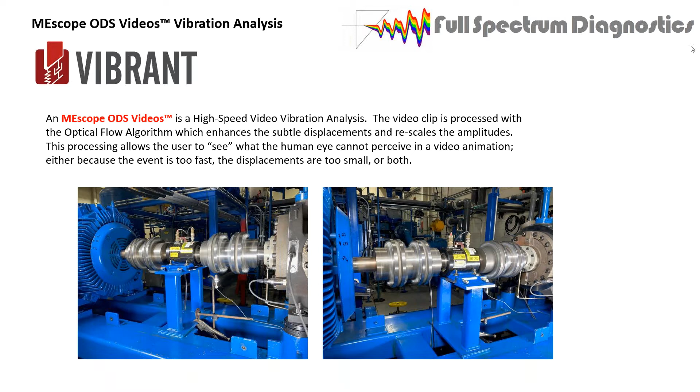Let's step through this. Where is it? My screen's locked for some reason. Sorry about that, let's see if it breaks free here. There we go, okay, this is that same system we just looked at. Oh, we're not there yet, Dan. I don't see anything. You don't see anything? No. Oh great. Okay, waiting, it says waiting to view Dan's screen. I don't know if you have to hit go somewhere. No, I don't think so. There we go, now we see it. Okay, that's it, that's it. There's some show screen button, I should have known that. You go.

All right, there we go. Now we're seeing. You saw this page though, right? Yeah, we got that page. What this is, is ODS video, and I pointed right at the center of the system on the torque platform, and I shot the entire wide view. So I got both couplings, the end of the motor, the end of the compressor, and the torque stand.

And I put on the orbit plot so I could see the motion, and you can see it looks like it's kind of galloping on either side of the torque stand there. But the orbits give you a good idea of what the direction of the motion is. So the torque direction or twist direction would be vertical, and in the axial direction, that would be the thrust-related problems. It looks like a lot of these orbits are longer in the axial direction than in the vertical direction, and it makes sense, and it looks like what we're seeing.

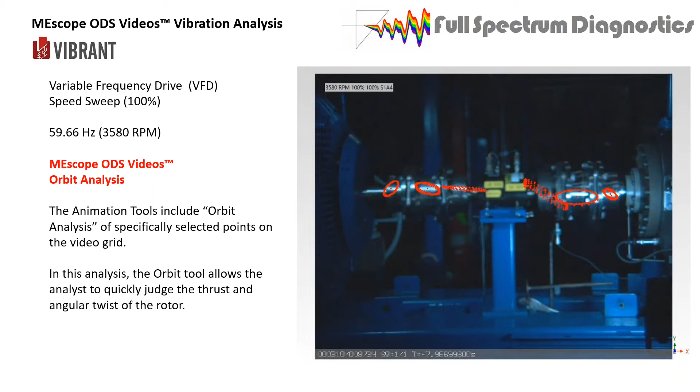Here was the 100% speed, 60 Hertz, for 3580 RPM. This is 3225, so 90% speed, and you can still see the orbits are a little smaller in size, but they're still in the axial direction for the most part. There's a little more axial than vertical.

This is at 2865, or 80% speed, and it looks like a sweet spot. We've lost a lot of the amplitude in the orbit. There's still some thrusting motion you can see in that direction, but this is one of the characteristics of the Shim pack coupling - it dissipates energy that way and keeps the alignment, tolerating a lot of offset misalignment, but it also has to move a little bit in the Shim packs to do that.

So we're at 80% speed. This is down to 65, and again you can see all the other things going on. This is what caught our attention - actually, the speed sensor caught our attention first, but the platform with the torque meter on it is moving.

After processing a few of these things, we came to the conclusion that our test stand didn't look like real life at all. What's happening in the field is they have no torque stand, obviously - they have a single coupling, and actually a different size coupling, which is another issue we'll get into. So we thought, let's modify the test bed, take out the torque stand, move the motor over, and just have one coupling.

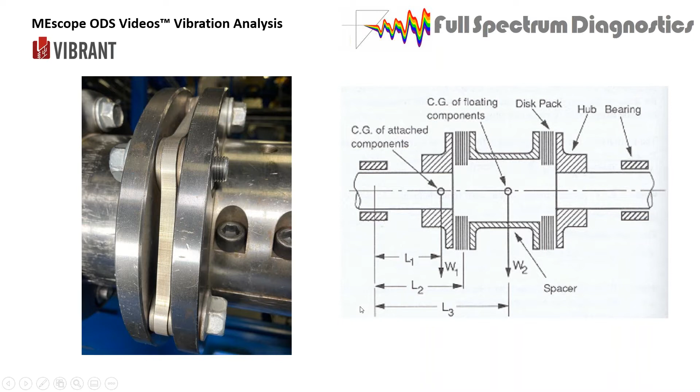So now we have a system that's a little softer than just a rigid coupling. Every time I get some type of torque oscillation, thrusting, or offset misalignment, it puts a shear into the Shim packs and allows the coupling to dissipate some of that energy. They're sized for all kinds of different horsepower configurations, torques and speeds. That's how this kind of works, without getting into too much detail.

So the shaft is spinning. We processed it so we can see rotation at 1 times RPM. There's very little motion in the compressor itself. We did detect a little bit of a soft foot in one of the feet, but besides that, it was pretty much rigid.

This is the animation in the FFT, which doesn't show the rotation of the shaft - it just shows the rotation and what happens every revolution. So this is at 1 times RPM. Put my cursor on that and it'll show me how that motion works, like any good operating deflection shape. If you look at this long enough, there's some thrusting in here. Most of the motion is a little radial or twisting, but a lot of this is the axial motion, or this galloping in the shaft direction that I mentioned in the last animation.

That's all good. It looks like something I'd say we're dissipating energy from residual imbalance, residual misalignment, normal angular offset and radial offset. Where the thrust comes in is on the output side.

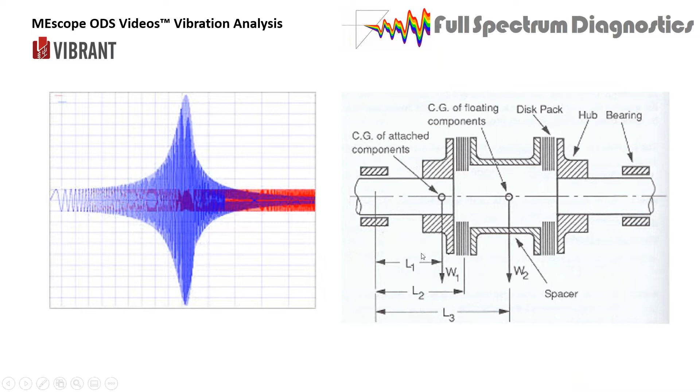Okay, so here's what we have. We took out that torque stand. We have 1 coupling now with the shim packs in there. And I'm showing the rotational speed of the shaft at 45% speed, which is 1611 RPM, and I filtered that out.

So as I explained before a little bit, I took the total time waveform, just the raw data. I did an FFT of that so I could see the frequency content. I put a narrowband filter around the turning speed of the shaft and did an inverse FFT. So now I have a time waveform that is just the turning speed of the shaft, okay.

So I have something that I think how this should work. If I have an angle of twist in a soft system like this, I have the motor driving some of it, and it's exactly like this: very low amplitude on the motor side, and the reaction torque that's being generated will be a little bit higher on this, spooling into the spool piece. Same thing in the compressor—it'll be lower here and react through that spool piece, and through the shim pack I should have something going on, actually maybe a twist a little bit more, and we'll see some that have a little more twist and others that don't. But this should be out of phase with the output side, and there should be some reaction response in the middle here.

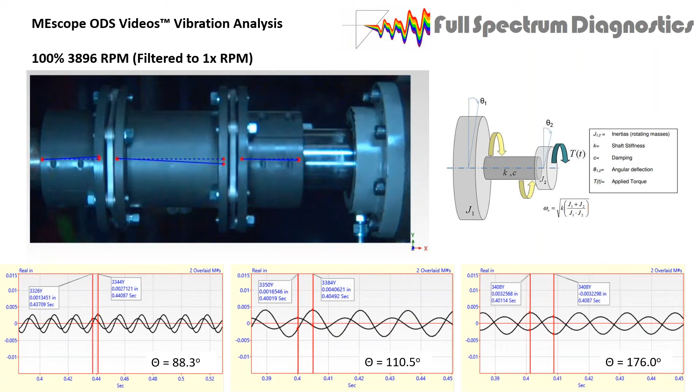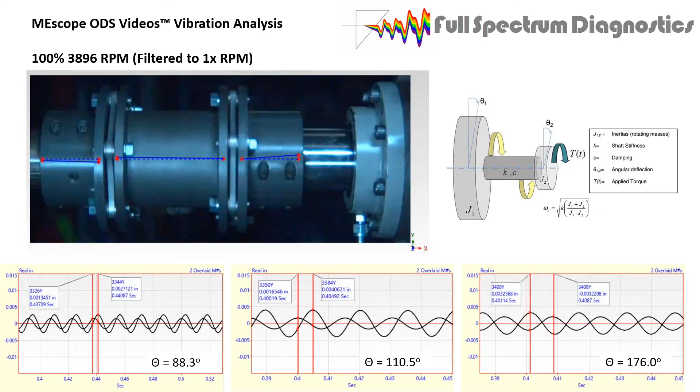This is, and then actually next week I'm going to do a grid style coupling in a plant. They wanted me to see what the alignment looked like on it, so I'll know more. It's a learning adventure.

This is a scroll system in a sugar beet factory. Sugar beets are where most of the table sugar in the United States comes from. Everybody thinks of sugar cane all the time, but the big beet farmers in North Dakota and Minnesota capture the entire market. These scrolls slice up the beets and boil them in water, then push them through these scrolls. When they're saturated with water like that, they squeeze all the liquid out and it turns into pulp. Then they discard the pulp, and what's left is sugar water, and quite a bit of it.

This is a very difficult analysis project because of the speeds involved. The output speeds of these scrolls are 1.2 RPM, so very slow. There's a massive gearbox on the input side of this scroll system that you can't see here. I'll show you the diagram in a moment, but it starts at 1800 RPM. Its belt drive is huge, and it drops the input speed to the gearbox to 216, and it's a quadruple reduction gearbox.

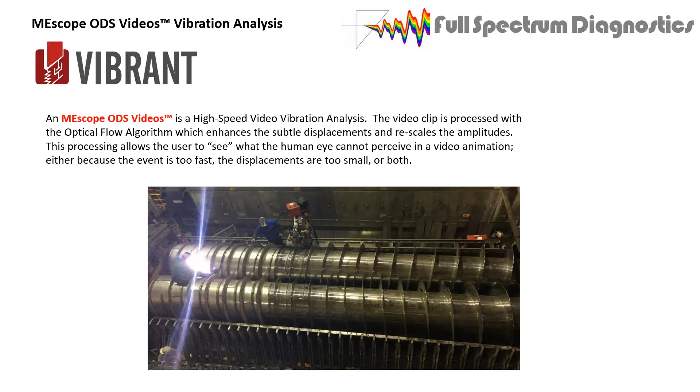This is the gearbox, and my portion of this project was through a little window on this side, about a 16 by 9 inch window, and another on that side. This gearbox input speed is 216, and there's dual outputs, so the left and right scroll get independently run, or they're all geared together so they run exactly the same speed. This gearbox shows you where all the meshings are.

So what I'm interested in, looking at the video through the side, is what frequency am I seeing, and is that frequency of interest to me? More about that in a minute. Here's our pinion, it goes through an 18 to 63 reduction. There's a 19 to 58, a 17 to 65, an 18 to 79, and we're out of this at 1.2 RPM. There's a few other frequencies that we'll be interested in. The gear mesh frequencies go from 3888 down to 95 RPM.

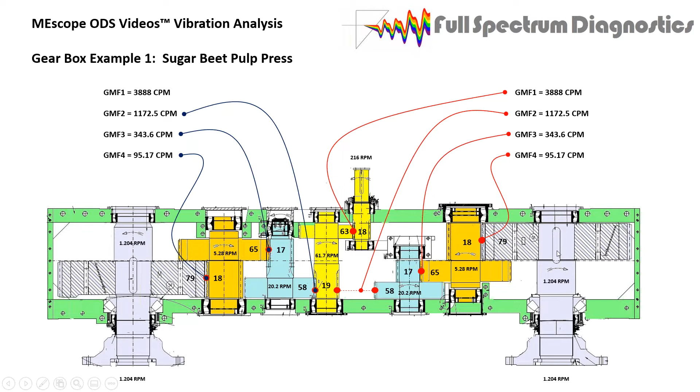So we'll take a look at those and some of the shaft speeds and whatever else we can pull out of this. This is a spectrum from the video camera. We pulled out time waveforms for every location, every grid point we defined, thousands of time waveforms. We also process those in FFT or Fourier spectrum so we can pull out the frequency content. In this case, you're seeing a whole string of the third gear mesh frequency. The first and second gear mesh are much higher frequencies and didn't show up. The third and fourth are the ones that showed up in the spectrum the most, and they generated a lot of low frequency energy.

So I have 1 through 10 times gear mesh frequency for the third mesh, and 1 through 8 for the fourth mesh. You can see all the different possibilities we have in here. There's a lot more frequency content.

It's just like a transducer analysis with an accelerometer. Put it on your structure at the bearing and you're going to pick up whatever's transmitted to the bearing. When I shoot a video, I'm picking up the spectrum of every point in that video on the gear. So I'm seeing directly what the gear is doing instead of trying to figure out what the gear is doing as its energy runs through the whole system and out the bearings.

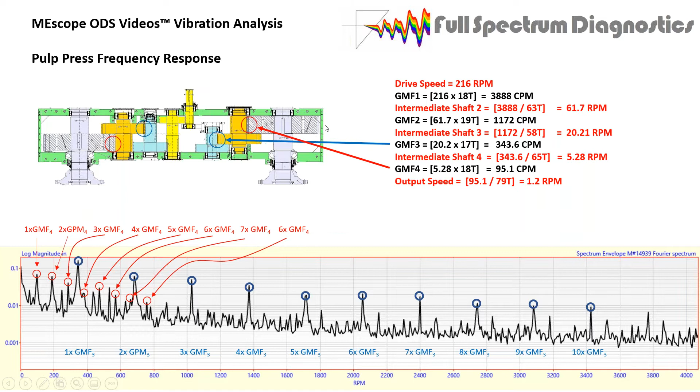Here's the locations of meshing that we're interested in. The third mesh and the fourth mesh are the two locations that we're going to be able to see through the ports on the side of the gearbox.

There's another thing you can do with the MEscope software that the competitors can't do. You can draw some lines on your system and see the motion and the difference in the motion. So I just outlined a couple of the gear teeth that are in view and put their links along here, just to see how one mode relates to the other.

And this is 1 times gear mesh frequency for the third mesh and 1 times gear mesh frequency for the fourth mesh. And it looks like the third mesh is flexing this gear, and the fourth mesh is flexing something else back here.

So even though you're doing a video analysis, you still have a frequency analysis and a time waveform analysis, especially for low-speed gear systems. That's really important.

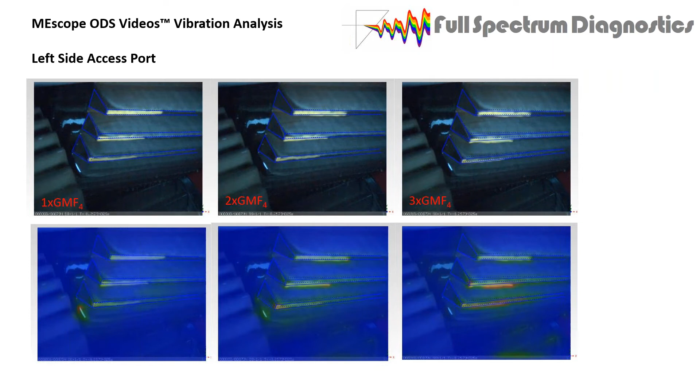This is how I originally looked at it. Put some color contour on. These are a bunch of different gear mesh frequencies, multiples of gear mesh. We have a normal exposure at the top so I can view the teeth and see them bouncing in there. They seem to be waving a little bit. Nothing's quite the same. The color contours give you a better idea of where the maximum motion is.

So they're all different. Every time you get a tooth engagement, it lets go, it rings the gear, and it rings all the natural frequencies. It's like hitting it with a modal hammer and getting the frequency response. It gives you an idea of how it's reacting to this knocking sound or binding of the gearbox. So when I go look at the other 4 gearboxes, I can see if they're doing the same thing. They're all supposed to be identical, but you never know.

This is another gearbox, in a cement plant. It's a ball mill or finishing mill. We have a synchronous motor here at 720 RPM, a huge gearbox with triple reduction, and a ball mill on the end. This rotates and has giant balls, steel balls in it, like shot put balls, and it rolls and tumbles those balls and crushes the rock into powder.

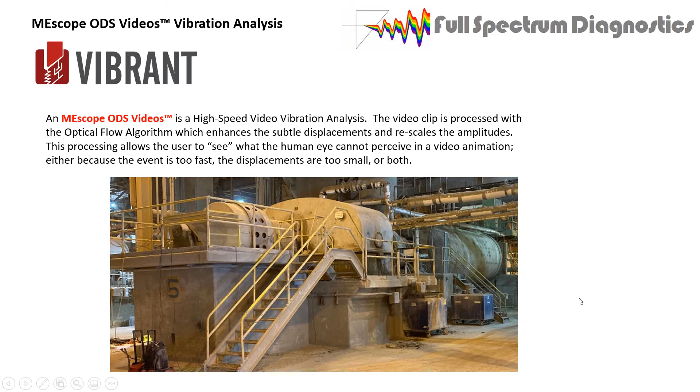What you see all over the place, this is one of the dirtiest places on earth, is cement powder everywhere. In some rooms it could be 6 inches deep. Up on this platform it was about 3 or 4 inches deep because nobody shoveled it off in a while. Not the most desirable place to be, but it was a very interesting gearbox.

This is how it's laid out. There's a dual drive system after the pinion. Input is 720, it drives both of these 370 tooth gears. So now the speed of each of these gears is the same. That shaft mates up with the output shaft. And you're like, well, where's the bearing on this?

There's A, B, C, and D holding on to the intermediate shafts. Here's the pinion, it has a couple bearings holding it, linked to the motor. Out here, there's only a sleeve guide bearing out on the output shaft. This shaft drops in and sits on these 36 tooth gears. So there's occasional alignment issue that comes up because of the way this is put together.

I asked a little bit about that, and this unit has been in operation since the 50s, and it's a very good design. The people that originally designed it made it too good because they expected it to wear out, but it's just replacing parts every decade or so, and they've been running this thing since the 50s.

So we got 2 gear mesh frequencies. The one that really shows up in the data is the 3299, but the intermediate shaft speed, if you do any gear analysis, shows up as a sideband as well. And I did find one other thing, I'll get to that in a moment.

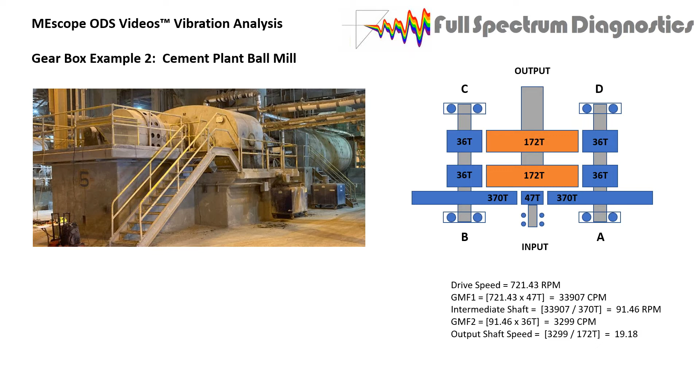So that one problem was solved. Well, not solved, they still have the wear problems. So we'll have to see.

But part of this analysis was, let's look at the gears directly with the camera through one of the ports. They had a west port and an east port. This is the west side. It was the right direction so I wouldn't get all full of oil when I opened it up. So we just took data out of the west side port.

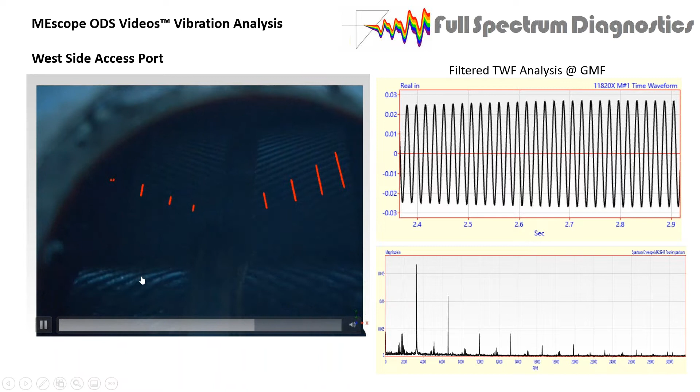This is motion that has exact numbers in it, so this is a frequency animation. The direction I'm interested in is the Y direction. So 8,000ths, 6,000ths, 13,000ths on this side. So the highest is 13 thousandths.

On this side, it's a little higher amplitude: 41, 36, 26, and 19 mils. So you have a little idea of what the total motion is.

And then this is the last cut showing a little lighter version. I put a little contrast on there so that I could see the teeth a little better. And the hardest part a lot of times is trying to get enough light on something like this so you can actually see what you're looking at.

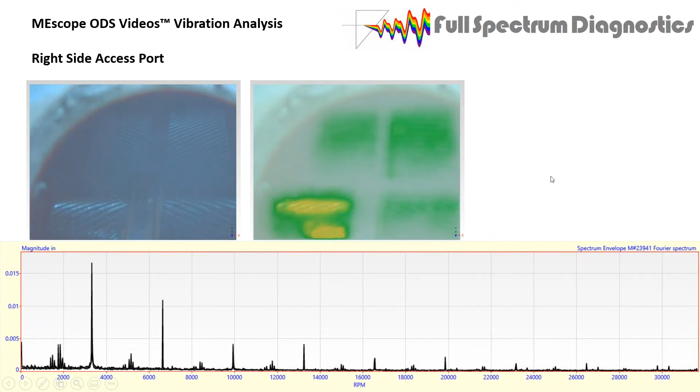I had both panels up in front of that portal, and it was a little difficult, but here we can see the color contour that's telling us where the biggest portions of motion are.

And the last one, and I'm getting close to my ending time. This is a belt-driven fan, and this is my setup on one of the measurements I took. If you guys aren't familiar with this, it's a Chronos camera, and it's a color camera. They do also make a black and white, but they make the color that I use most of the time.

This is some panel lights, and these are batteries on the back. I would suggest you get battery-powered units if you can, because plugging stuff in with cables in a plant is very challenging. So we're going to take a look at this, and one of the things we're going to look at is the isolation system for this, and very interesting.

Remember, I have turned the volume up and amplified these so that I can see the motion. There's a reason why this whole thing, the whole floor, looks like it's bouncing up and down. And that reason is because the whole floor is bouncing up and down.

This is a diamond grid plating, and I'll show you what that looks like a little better in another view. It's hard to see in this view with the dust on top of it. This was in the sugar plant as well, so there's sugar all over the floor.

I put the color on so I could see the bounce. The floor's bouncing, but the frame on the isolators is bouncing up and down too, quite dramatically, as you can see from the amplitudes.

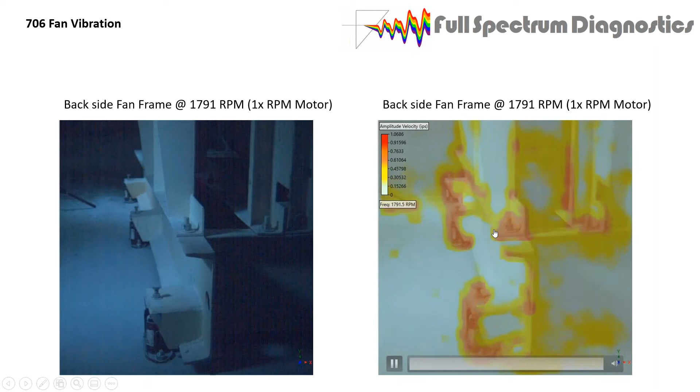This is the backside frame of the fan, similar as before. This is actually the same animation as before. I'm comparing it to the backside of the fan at 2269, running speed of the motor, running speed of the fan.

And I have two different motions. So the frame is being driven, it's a natural frequency in the structure. The isolators are really not doing their job.

Here they're bouncing up and down in the first mode. Here's the pitching mode all the way across the beam from front to back on the floor. So you can see that we're working the isolators.

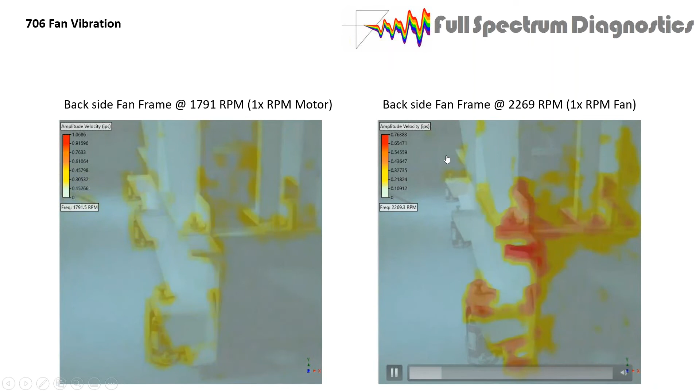I'm going to look at the other side. This is the same side of the fan, but from the other direction. Now you can see what I'm talking about, these diamond plates.

So these panels are on the floor, and I believe that they're just a loose connection. Underneath there, these thin panels are attached to an I-beam that runs across the floor. So these bolts actually do go into the I-beam, but they're sitting on diamond plate, so they're not shimmed, they're just absorbing all that energy.

So basically I have a loose condition underneath all my isolators, and they're bouncing up and down. And you can see that a little bit more on this second mode. I had a lot more motion right here. It looks like I'm working the isolator pretty hard.

Here it's kind of a node point, and out there I can't see very much from this end. But this flexing is actually occurring. There's a lot of motion in this C channel that's supporting the whole frame.

Oh, that was it. Thought I had one more slide, but that's okay.

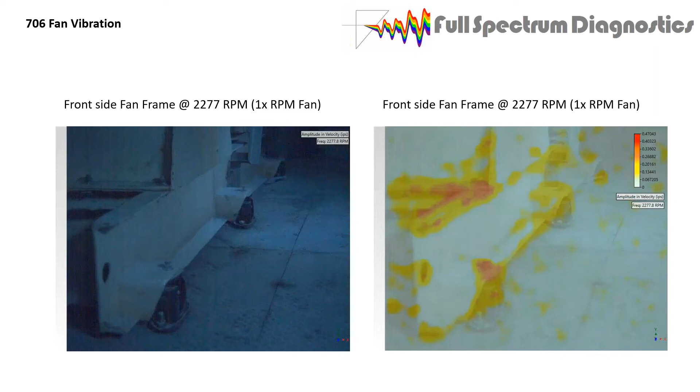We had a question: can the camera be mounted on a moving vehicle looking at a specific part of the vehicle? Absolutely, I don't see why not. You'd have to have a good mount. The motion picture industry makes mounts for cameras that take all the background motion out so the camera stays steady. If you Google it, you'll find them all over the internet, and I assume you could use one for this.

I haven't done it, but it would be interesting.

Next question: how sensitive is this method to camera motion, and can the motion of the camera be filtered out? There's a couple things. One is to avoid it - in this case I'm setting the camera up on diamond plating that's actually moving. In the software, you can pick a background location and subtract it from all the measurements. So if something in the background like an I-beam is bouncing up and down because the camera is moving, not because it's really moving, you can pick a point on that I-beam and subtract that amount of motion from every spectrum. It's not a perfect process, but it helps quite a bit.

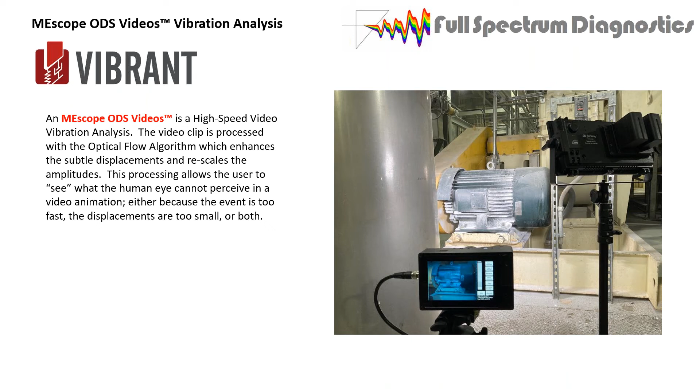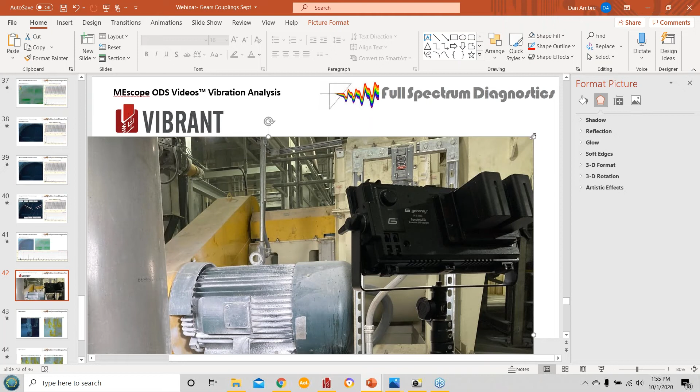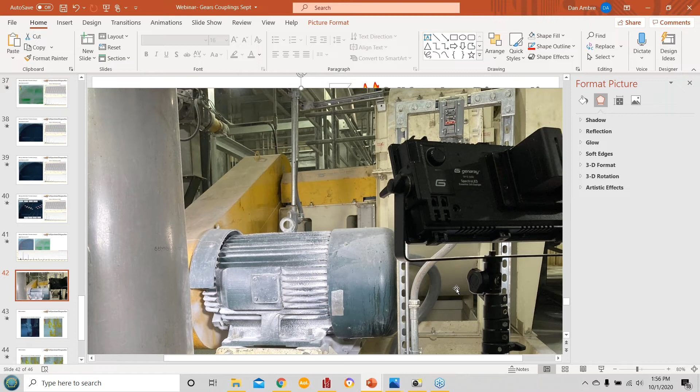I think if you zoom in you can see it on the back of that light. Generay, G-E-N-E-R-A-Y. I can't see the model number, but this model, they've upgraded it - they don't sell this one anymore. They sell another one that has more LEDs in it, which is fine. You want as many LEDs as possible when you're doing this type of work.

Okay, we got a number of questions coming in here. This one's a little more technical. Based on the coupling case study, can you relate the torsional frequencies with the MNFs to confirm torsional problems?

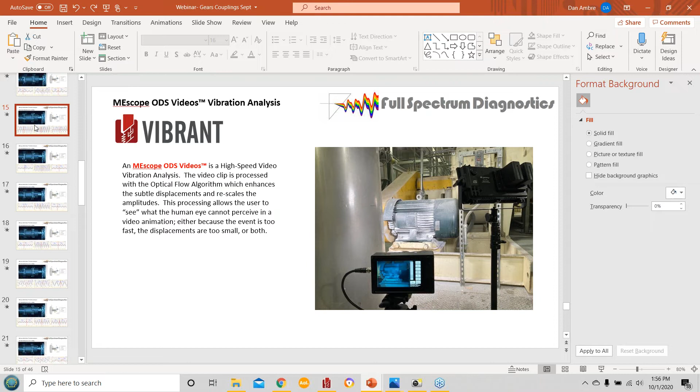If I understand you correctly, yes. I think we've got it down to, if we have a problem, we can detect it based on what we're doing. What you're looking at when we put those lines in on the side in the video, that's torsion that it's measuring. So you're measuring it directly. It's not lifting of the whole thing, it's the shaft spinning. In every revolution, it's telling you how much it's spinning up and down, if that makes sense. And knowing the difference between these two is the sine waves.

So the angle of twist is there if we have the right magnitude. I don't know if I'm explaining it correctly, but I believe you have all the parameters there to see what your torsion is. The problem we've been having is with the manufacturers of the coupling not giving us all the information as far as the inertia and the torsion testing they've done and how it varies.

All right, question about the camera. How long of a video can you record? If you leave the camera on, well, probably 2 hours or so.

It depends on how you use it too. If you turn it off in between, when you're moving stuff around, that helps. And with the lights as well, the lights on battery packs, I've found that they last about 2.5 hours. And I know that because I left them on.

I think you might be asking how long, like 8 seconds, 16 seconds. How long is the capture? Yeah, that's what I'm guessing he's asking. The capture, you can get a version of the camera that's 16 seconds, and I believe that's the highest they have right now. The one I have, the 2 that I have, are 8-second cameras. But yeah, like the low speed event, like this 1.2 RPM output on the gearbox, you'd never be able to get a full rotation. That would take 50, 60 seconds.

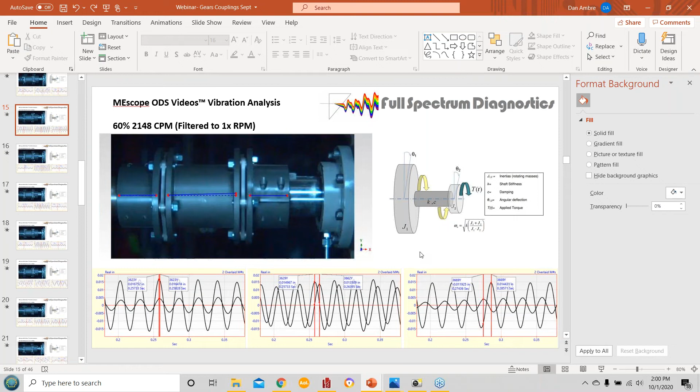Let's see, let me jump down here. Can you review how you generated the reverse FFT? Yeah, let's see if I can do one.

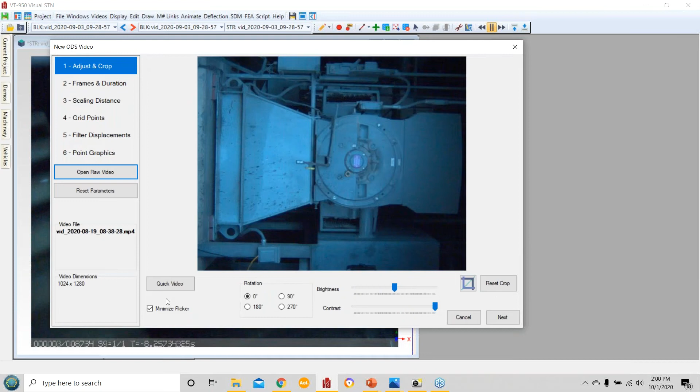This is probably something I should have done anyway. You go into the wizard, you can open up the raw video, and let me do one that'll be a little faster to process. We'll do this. This is just a motor, end of a motor. We're going to turn it sideways. We want to tell it how many frames the capture rate is. I'm not going to take 8 seconds of data, I'm going to take 1 second. It shows me right here at 1,057 frames per second, which is pretty standard.

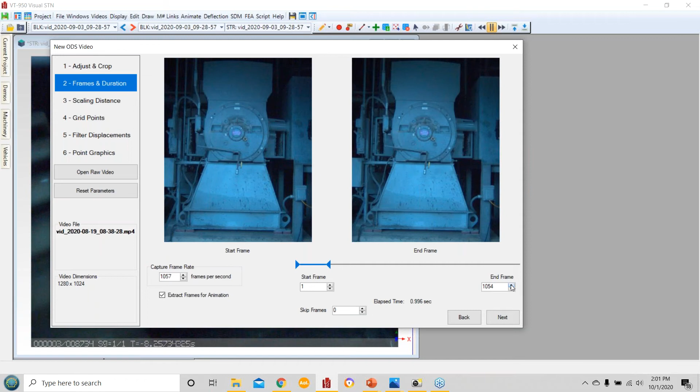Sorry, this is taking so long. Okay, so I got 1 second of data. I'm going to set my distance, and the known distance is about 6 inches, I think, right there. I can do a number of points, whatever I'd like, and extract the time waveforms.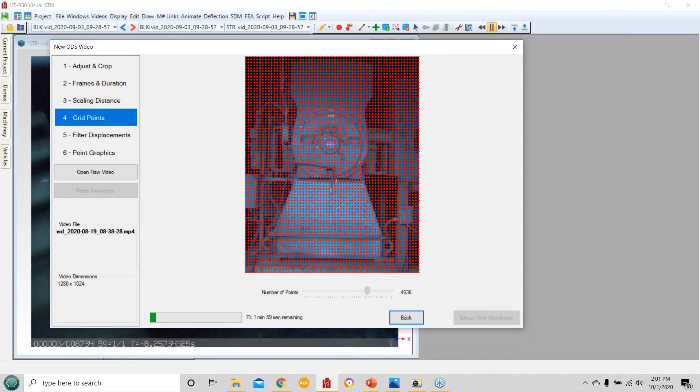Go faster. Oh, this is coming off of a thumb drive, so it's, oh shoot. So while you're letting that run, if you want, I can answer some other questions. Well, hold on, I'll just make it a little coarser, dial it back a bit. Yeah, it's still going slow. Okay, yeah, what's your other questions?

Okay, well, there were a few other camera-related questions here. How long is the capture? What's the sample frequency? What's the highest frequency that can be measured? The sample frequency is 1,057 frames per second.

That's at maximum resolution of the camera, so 1280 by 1024, something like that. You can make the camera go up to 40,000 frames per second if you want, but your resolution is going to be really awful. The best resolution is that 1280 by 1024.

So at that frame rate, 1,057, and I've never changed it - that's what I take all my data at. Your F max, you have a Nyquist factor, so it's half of that. So 528 hertz, I believe, is your frequency range.

And I was exploring a little of this. There is no anti-aliasing filter, so you can have aliasing problems that occur if you have a high input response that's above F max that might fold back into your data. I thought that was happening on one of my jobs this week, but it turns out I couldn't figure it out, or I couldn't find it. So I don't think it was an aliasing problem, but that can come up.

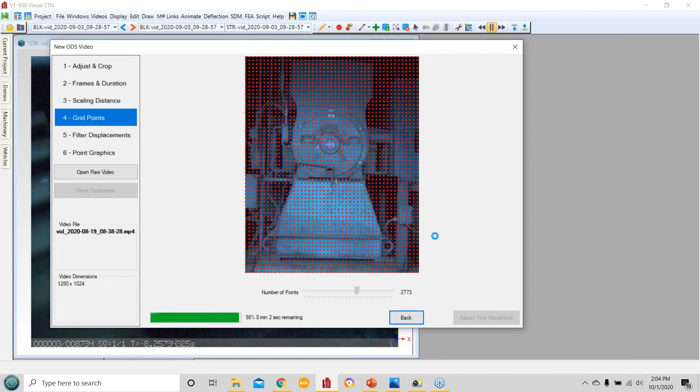So your maximum frequency range of 528 hertz is pretty good for most applications I've been around. And again, the time waveform - if you put it in the Fourier spectrum, you have 528 hertz. If you use the time waveform directly, it'll give you twice the resolution. It'll be better as far as animation, but you can't pick out the individual frequencies.

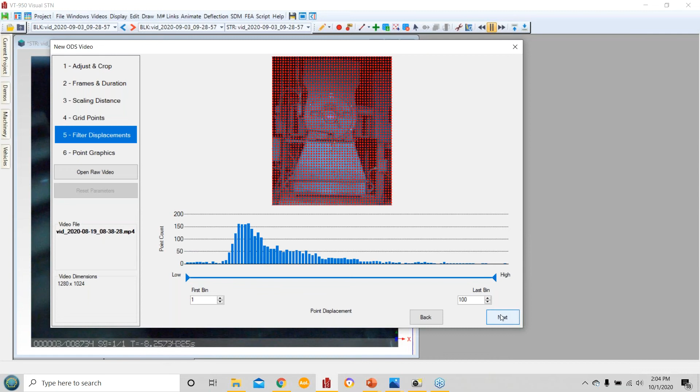Now, what I'm doing here - it was a nice lead in. Here I have finished my thing. I'm going to replace my initial data with this data. So I put it through the wizard.

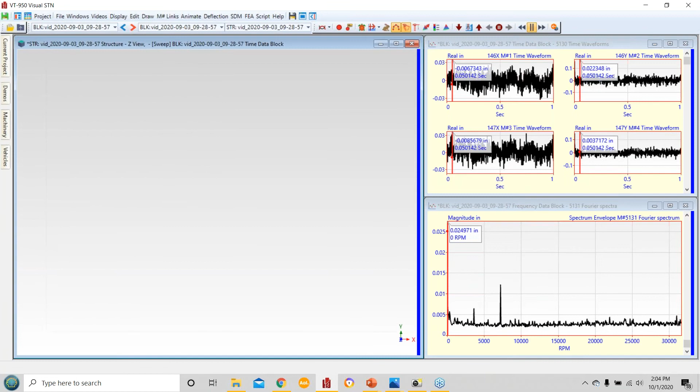I get all the response I want. Here's my spectrum down at the bottom. 3596, and you can see the motor bouncing on here. And they've had a problem with this unit. This should be 7200, so there might be a little camera flicker in there, but it looks like there's a natural frequency that's being excited at 2 times.

So 3600 RPM is 1 times RPM. Now, if I want to look at a rotating shaft at the same time, I can process the time waveform data. Let me turn this off.

And filter out any frequency that I want. So here's my time waveform window. Up in the drop-down list is a transform window, and I can FFT it, turning it into a Fourier spectrum - very much like this down here. It's showing a couple of different things in the other direction. This is an overall level, but it looks a lot like that, right? There's a 1 times in there, and a 2 times, basically.

In here, I'm going to put a dual cursor out. Let's say I want to look at that 2 times line frequency or the 2 times RPM pulse in there. I can put my band cursor around it. Let me get a little more. And effectively, I'm going to remove everything else in the spectrum except this peak.

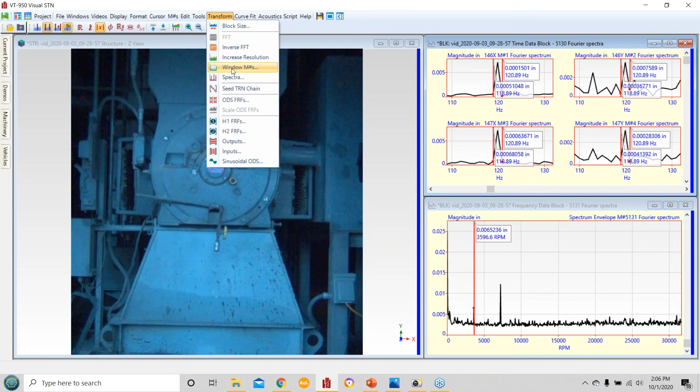And this is whatever peak I want. I go back into the transform window - I don't expect you to remember this, but that's what training classes are for. I can go into the window format function, do a band pass, and apply it.

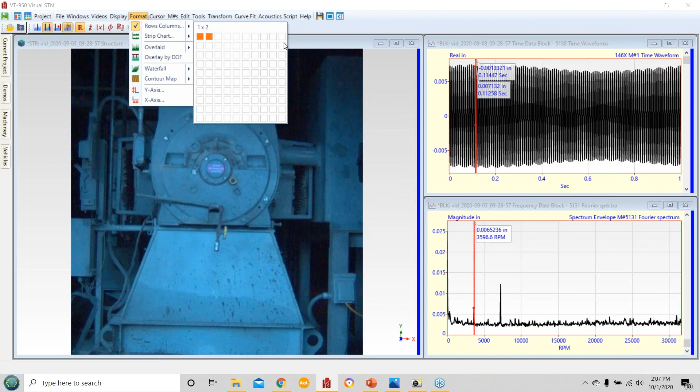And now I have just that frequency showing up, right? It's still there. Everything else is gone. Now I can do an inverse FFT, and there's my waveform. Let me get one plot up. So here's my waveform. There's a little pulsation to it, so there might be a little bit of sideband energy or something in there that's showing up.

Now, if I decide I want to look at just that 7200 or 7190, whatever it was, I can go in there and do that. And there it is - it's moving way too fast, so I take the speed down to 1 or so. And now you can see how the structure is moving.

So some piping's moving. There's a big electrical box on the side here, and there's a big baffle box up at the top to take out the acoustic noise.

So that's basically it. Basically you take your time waveform, you use this transform box, you do an FFT, you go and put your band around whatever peak you're interested in, and you do a window function with a bandpass window, and then you inverse FFT, and now you're left with something that's purely 7200, or whatever frequency you chose. You can play with that all you want, go back and redo it for different frequencies. This is called bandpass windowing, and I think it's better - I like the time waveform animation much better than the frequency animation, and we can see the difference.

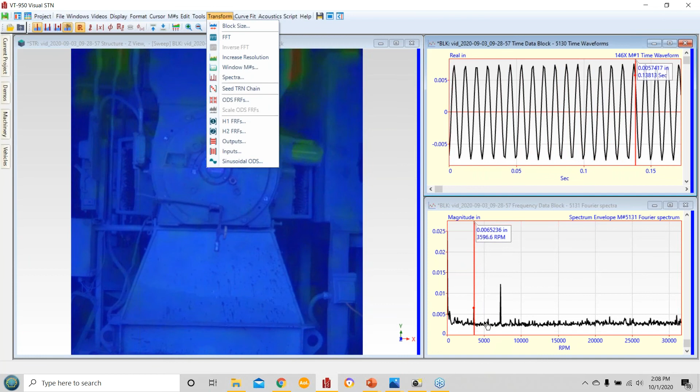Maybe it shows up in the movie a little bit better. But anytime you have a rotating shaft, you need to animate in the time window. If you can see the rotating shaft, or if you're looking at a coupling or a gear or something that's rotating, use this process and extract out whatever frequency you're interested in.

One of our engineers weighed in, Patrick, saying there was a command to do that from within the frequency window. Yeah, I haven't used it yet. I haven't used that hotkey yet. I'm still old school in it. Well, especially for something like this, you can't explain what it's doing by just hitting the button. Those are the steps.

Right, we had one last question also. Given that flexible borescopes are available, can you plug one into the camera to get views that you normally can't? I don't think we've ever tried that. Well, I assume the borescope has a light on it too, right? I would guess, yeah. So if that's the case, that's a great idea. As long as you can mount that, I don't know why you wouldn't be able to.

Yeah, the things you'd have to worry about is it moving around. You get jostled, background noise, and sticking it into a rotating part. That's not real good. I've had stuff like that happen. Push it in too far and it takes it off or drags you in.